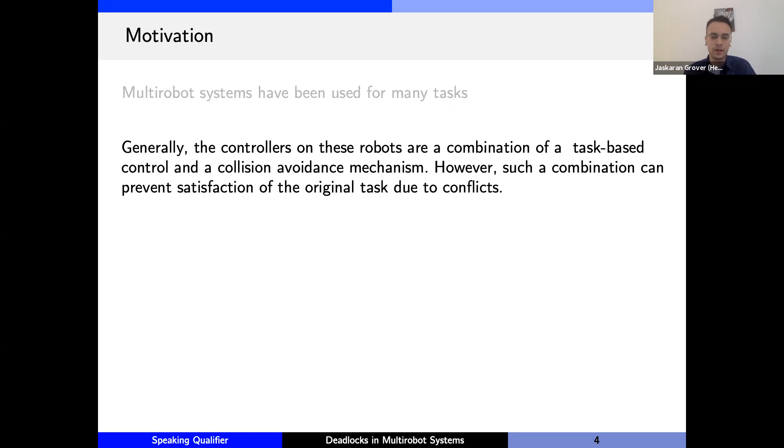Robots may stop moving to maintain safety, and as a result, they can end up falling in deadlocks. And this observation has been noted in several of these works. In fact, many of these works are recent from the last 3 or 4 years. And so given this, we wanted to formally investigate why do deadlocks occur? What is the underlying mechanics behind the incidence of deadlocks? And how can we use this information to resolve deadlocks? So in this presentation, I will try to walk you through some of the answers to these questions that we found along the way.

Okay, so let me summarize the main contributions of our work. Firstly, we provide a mechanism to analyze long-term behavior of reactive optimization-based controllers. In this presentation, we are primarily focusing on control barrier function-based quadratic programs, which are optimization-based controllers and have been very successful recently for synthesizing safe controls for UAVs and legged robots. But in addition to these systems, they've also been used for multi-robot systems, and that is primarily the focus of our presentation. So CBF-QPs, that is short for control barrier function-based quadratic programs, are the underlying control synthesis module that the robots in our multi-robot system will be using.

So we demonstrate that when these controllers are used for collision avoidance, in addition to goal stabilization in multi-robot systems, they can cause deadlocks. And particularly, we show that when there's geometric symmetry in the initial and goal positions of robots, that is a scenario that is particularly susceptible to deadlock. We're not saying that asymmetric situations do not result in deadlock. We're only saying that symmetric ones definitely do.

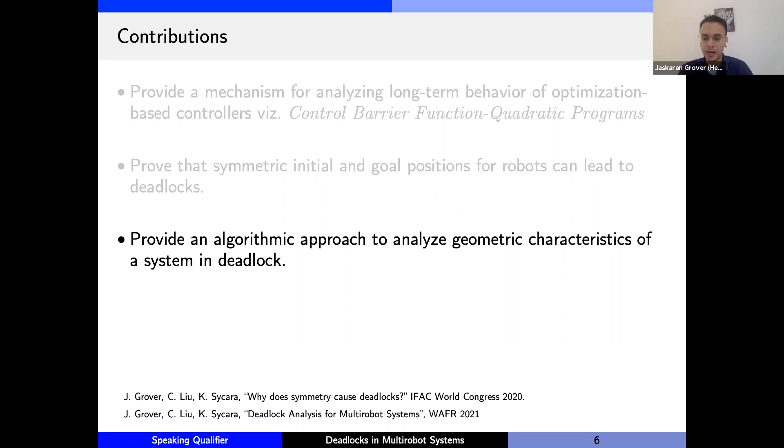We provide an algorithmic approach to analyze geometric characteristics of a system in deadlock. And we use tools from duality theory and KKT conditions to characterize some of the properties of geometric configurations in deadlock. And using these characteristics, we devise an algorithm to resolve deadlocks.

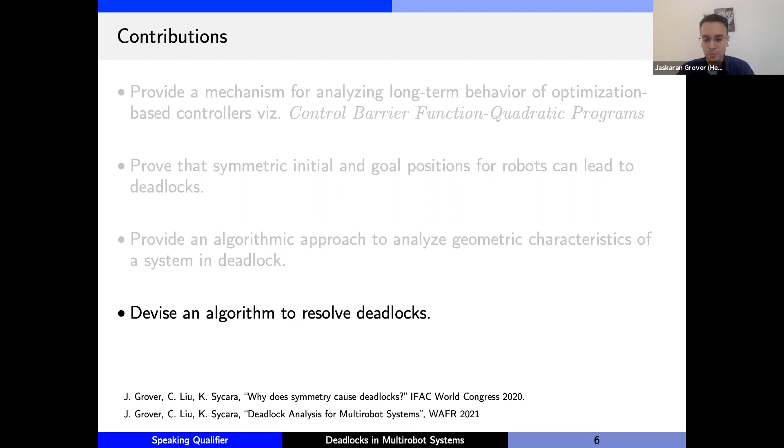All right. So let me go through some prior work and review some terminology from avoidance control and goal stabilization. And the aim here is just to make sure that all of us are on the same page. Since CBF-QPs is a relatively recent subject, there's lots of jargon that is used here. And I just want to make sure that all of us throughout the presentation know what I'm referring to. So everything that I'm going to be presenting in this particular section is going to be on prior work.

Okay, so let's see the setup. We have N robots in the plane. And just to make things simple, we're going to focus on just one ego robot, that is robot i, that is shown in blue color here. And our aim is to make sure that this robot reaches a destination position, that is p_di, while avoiding collisions with every other robot that is shown in gray. Now, the same must hold true for every other robot in the system as well. So each other robot, let's say the gray robot, will have a goal of its own, and it must avoid collisions with every other robot in the system.

So we assume that all these robots are velocity controlled, so they follow single integrator dynamics, which is given by P dot equals U_i. And as far as this dynamical system is concerned, this is the best that we can ask for. And the reason for that is because it's linear, it's controllable, it's first order, and it's decoupled. You can control X and Y independently. So this is as best as it gets.

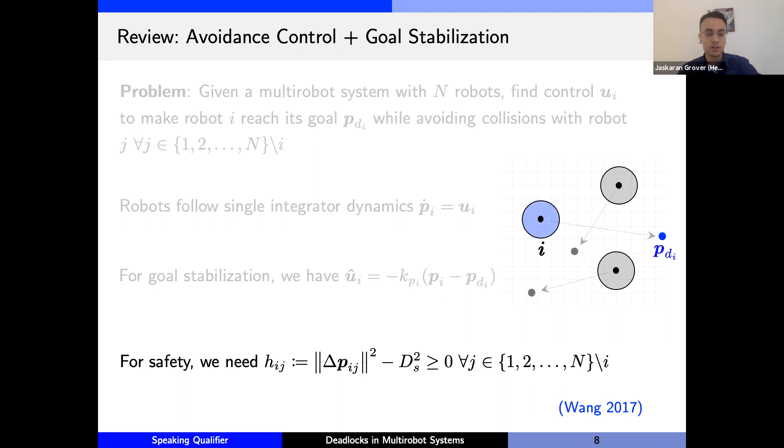And to pose that request, we are posing this safety index that is pairwise. We call it h_ij. And we say that robots i and j are collision-free if and only if h_ij is non-negative. Now, h_ij is known as a control barrier function, or a CBF. All right, so what have we seen here? As I said earlier, for i and j to be collision-free, we need h_ij to be non-negative.

Now, obviously, if it is non-negative at the current time instant, we also want to make sure that the control that we synthesize on the robots makes sure that h_ij remains non-negative at the next time instant as well. And the way that has been done in prior work is by enforcing this derivative requirement on h_ij. So by ensuring that h dot ij is greater than negative gamma times h_ij, we have guarantees that h_ij will remain non-negative at the next time instant.

Now, this differential inequality can be converted to constraints on the controls of robots i and j. This is the constraint on the control of robot i, and this is the constraint on the control of robot j. If the controls of robots i and j satisfy these constraints, then this condition will be guaranteed, and in turn, it will ensure that h_ij remains non-negative. So these constraints are half-space constraints. So the admissible space of feasible controls that satisfies these constraints is convex.

So what have we seen so far? I said that we have a reference control for reaching a goal, U hat, which is a proportional controller. By itself, it guarantees stabilization of the robot at the goal. And just now we saw some constraints to ensure safety. So we have two things here. How do we mediate between them? The way to do that is to pose a quadratic program, an optimization problem that minimizes the deviation from the reference control U hat subject to the safety constraint.

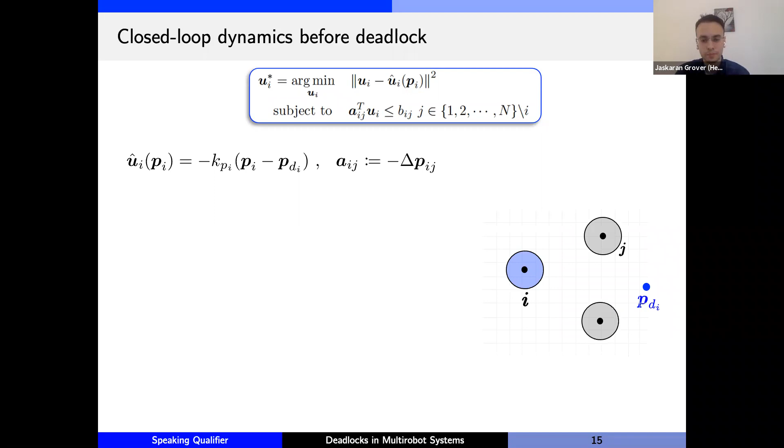So let's look at the geometry of the system. We have several robots here. I told you that U cap is a reference control that causes attraction of the robot to the goal, which is UI cap here. Because this is the primary task, we need to make sure that the optimal control has some component of the task-based control, which is UI cap.

In addition, I also said that Aij is a vector that connects the robot from robot I to robot J. Naturally, we don't want the robot I to go along Aij because that would result in collision with the obstacle. We want the robot to go opposite to Aij, so along negative Aij. But we do want the robot to go along UI cap because that is what will ensure movement towards the destination. So in addition to this, I'm going to add a component that is negative mu ij times aij, which ensures movement opposite to this vector.

And mu ij is just some weight, which is non-negative. It has to be non-negative just to make sure that I does not end up getting attracted to j. That would be antithetical to the collision avoidance requirement. The other purpose that mu serves is that it makes the units consistent. Like this is the unit of velocity and this is the units of position. So mu has units of 1/time.

Another purpose that mu ij serves, it ranks the relative risk associated with several obstacles. So if there's an obstacle that is several miles away, maybe I don't need to worry about collisions with that obstacle. So mu ij would be 0 for that one. And if there's an obstacle that's very close to me, I'll set mu ij to a very large and positive number just so that I duly account for collisions with that obstacle. So it has to be non-negative. And now there's several robots in the system, so I have to sum these repulsive forces from every other robot in the system.

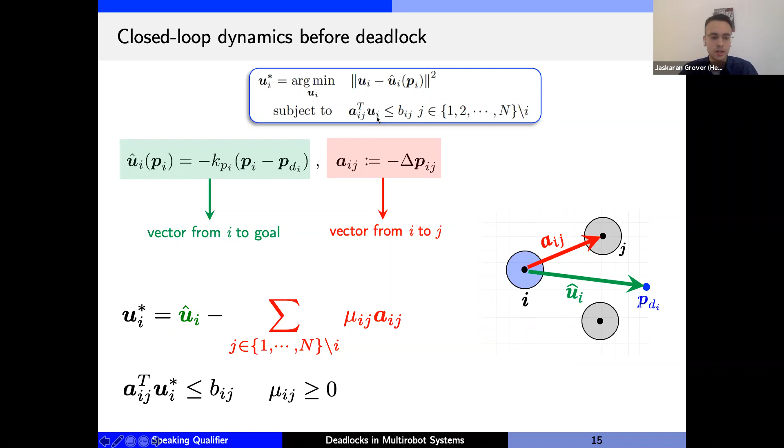So just to summarize, there are 3 things we saw here. I said that the optimal control is sum of 2 components. One is attraction to the goal, and one is repulsion from every other robot in the system. From the perspective of the ego robot, I can just call them obstacles. Mu ij, the weights have to be non-negative for valid repulsion. If they are negative, then you'll get attracted to the obstacle. That's not good. And the third is that the control must satisfy safety constraints as well.

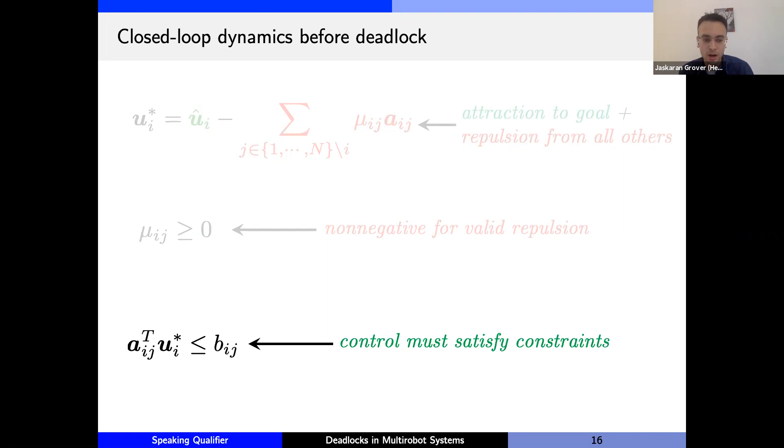There's 3 things here. Now, the claim is that this expression that I just derived in an ad hoc intuitive way is actually the solution to the optimization problem that we just saw. Now, why is that the case? Well, in optimization theory, there's something known as KKT conditions, which are necessary and sufficient conditions of optimality. So I say that UI star is a solution to this optimization problem if and only if UI star satisfies some constraints or equations. And those equations are basically the KKT conditions of this optimization problem. And just to make sure, this optimization problem is convex; that is why if and only if can be said. Otherwise, they're just necessary.

So the first condition, stationarity, is precisely saying that the optimal control is the sum of attractive and repulsive forces. UI cap is the one that's characterizing attraction to the goal, and this is repulsion from obstacles. Second condition, primal feasibility, is saying that UI star satisfies safety constraints. Dual feasibility is saying that the weights have to be non-negative, which we motivated by saying that the repulsions have to be valid. And in KKT conditions' language, mu I star is known as the Lagrange multiplier of this optimization problem.

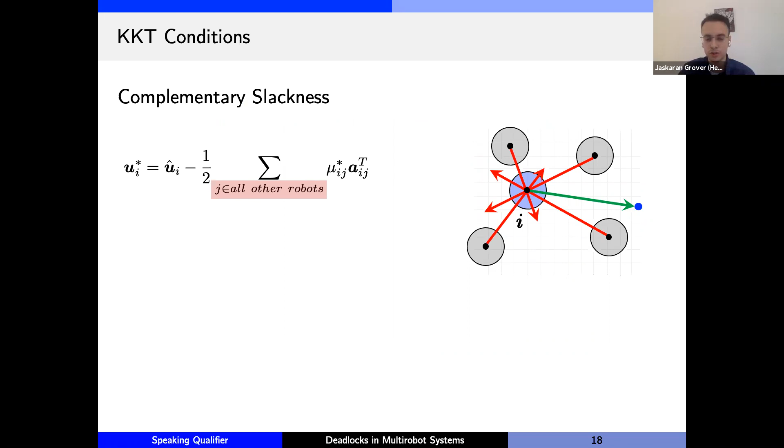And the fourth condition is complementary slackness, which I haven't motivated just yet. It's very straightforward. What it says is the following. So remember that we said that the optimal control has repulsive components from all robots in the system, in addition to the attraction to the goal. What complementary slackness is saying is that you only need repulsive forces from just some obstacles that are called active, and the rest of the obstacles can be ignored, can be neglected.

So in this slide, the red ones are the active obstacles that are actually accounted for while calculating the optimal control of the ego robot, and the gray ones can be neglected. And from my empirical simulations, I've seen that the active ones are the robots that sort of fall in the way of the ego robot trying to go to the goal.

And that's because these robots, which are already behind me, are not going to pose such an imminent threat of collision as those robots that are falling in my way of going to the goal. So I need to duly account for repulsions from the ones that are going to end up, or potentially going to end up, falling in my way.

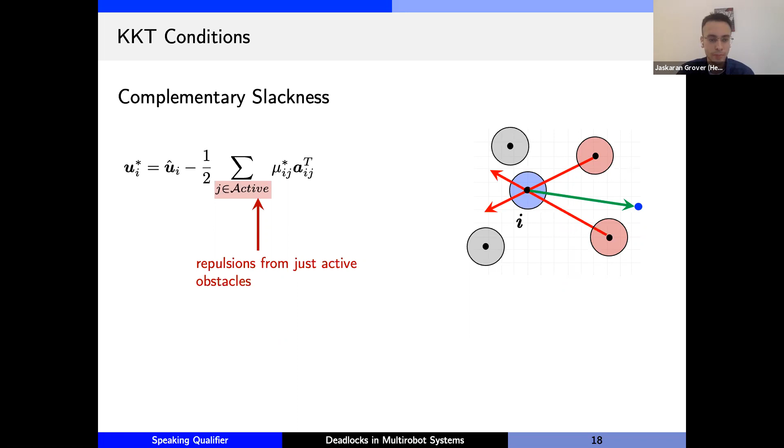So what have we seen so far? I said that all the robots from the perspective of the ego robot can be partitioned into two sets. There's one set that's active, which is the set that I worry about for collisions, and I account for repulsive forces from that set while calculating my optimal control. I said that the optimal control has two components. One is attraction to the goal, and the other is repulsion from the active obstacles.

And as far as whether the strategy works or not, I showed you a simulation in which it does work, so it delivers the robots safely to their goals. But then there are some situations in which it does not work, where depending on the initial positions or goal locations, robots can end up falling in a deadlock. So using this control, that is go to goal and repel from active obstacles, can result in deadlocks as well. And now all the analysis that we've seen is enough machinery for us to start to figure out why this is happening.

So the question that I'm going to answer is: given this control, can you tell me when will deadlock occur? Instead of answering when it will occur, let me first answer the question, when does it necessarily occur? Now, this second question is much easier to answer than the first. I'm not going to characterize every situation in the world where deadlock occurs. I'm only going to characterize a handful of situations where I can guarantee that it will occur.

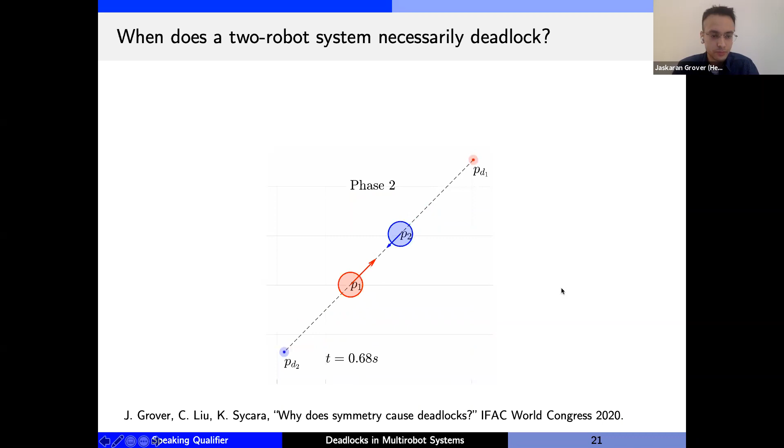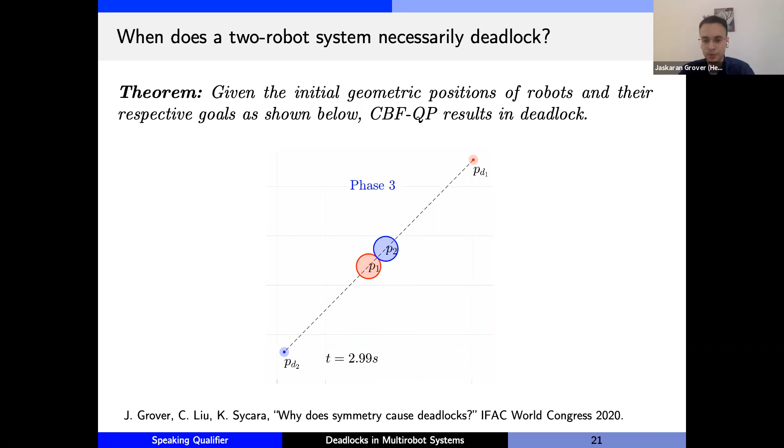So let me play this video. So given the initial positions and goals, CBF-QP results in deadlock. So what is going on here? Let's examine that in more detail. The analysis of the motion of these 2 robots can be broken down into several sequential phases, which depend on whether I, as the ego robot, perceive the other robot as active or not. So when I say that I, as the ego robot, am worried about collisions with the other robot, that means that I do perceive the other robot as active. And if I'm not worried, that robot can be ignored for calculating my optimal control.

Okay, so the analysis begins as follows. There's phase 0 first, which starts at t equals 0. It's just an instantaneous phase; it lasts for 1 instant. And at t equals 0, the robots are not worried about collisions with each other. Then, obviously, this pattern is going to continue for some time. And phase 1 starts when both robots continue to be not worried about collisions with each other.

Can everybody mute themselves, please? Okay.

And then phase 2 starts, where one robot begins to worry about collision with the other, whereas the other robot is still not worried about collision with the first robot. And then you have phase 3, where both robots end up worrying about collisions with each other. And it is in this phase that both these robots end up falling in deadlock.

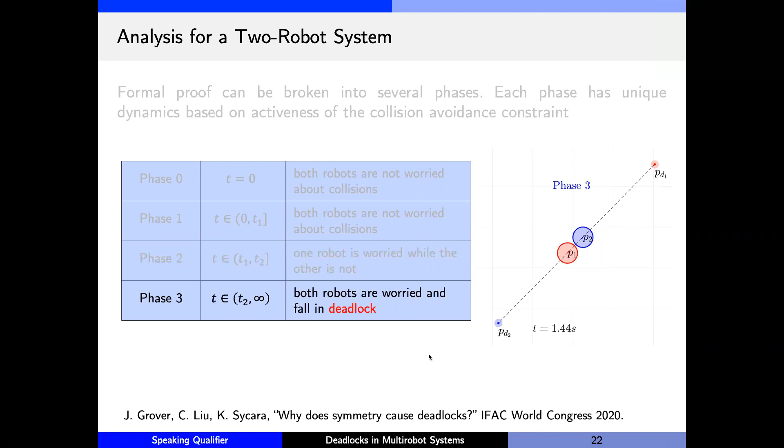All right. So I was saying that there's this notion of a robot being active with respect to me. There's this notion of me worrying about collisions with the other robot. What does it mathematically mean? What does it geometrically mean? So just to recall, I said that the control input is always the result of this optimization problem that all these robots are solving. For the two robot case, there's just going to be one constraint per robot, right? Because I'm only going to think about collisions with the other robots. There's just like one constraint.

Okay, let me see if I can mute everybody.

Okay, well, thank you. So for the two robot case, there's just going to be one constraint per ego robot. If it so happens that the prescribed nominal control satisfies this constraint itself, then the optimization problem will just return u cap itself, simply because if I'm saying that there is a reference with respect to which I want to be minimally far, and the reference itself is satisfying the constraint, then the optimum will be attained at the reference itself at zero cost. It doesn't get any lower than that. So the answer to this optimization problem will be the reference control u cap itself if the reference control satisfies the constraint.

Now, what is more interesting is that the reference control u cap satisfies this constraint if and only if the distance between the robots is more than a certain critical distance, that is beta I. So what I'm saying here is that the robot, let's say this red robot here, can use its reference control, pretending as though there isn't any other robot in the system. But it can only do that if and only if the distance between these two robots is more than the critical distance that robot one considers as a threshold.

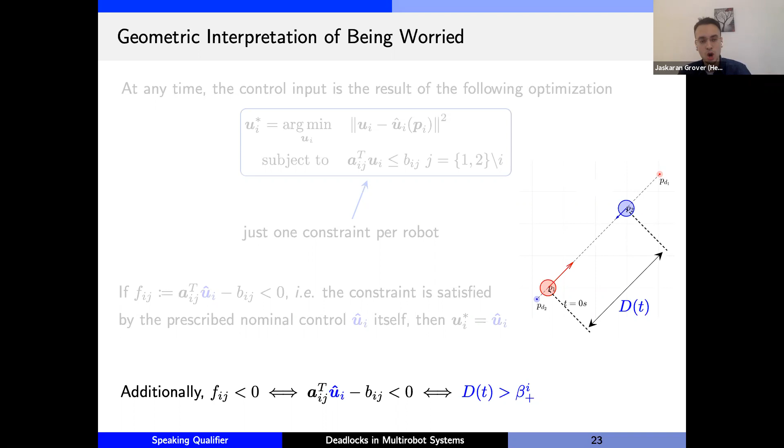So now that we know what it means geometrically to worry, let's start with phase 0 in more detail. At t equals 0, I'm saying that if the distance between the robots is greater than the critical distance of robot 1, meaning that the reference control of robot 1 is satisfying the collision avoidance constraint directly, then robot 1 can use the reference control. Here, this green dot is the inter-robot distance. Blue dot is the critical distance of robot 1, and you can see the green is higher than blue, so the inter-robot distance is more than the critical distance. So we are allowed to use the reference control for robot 1.

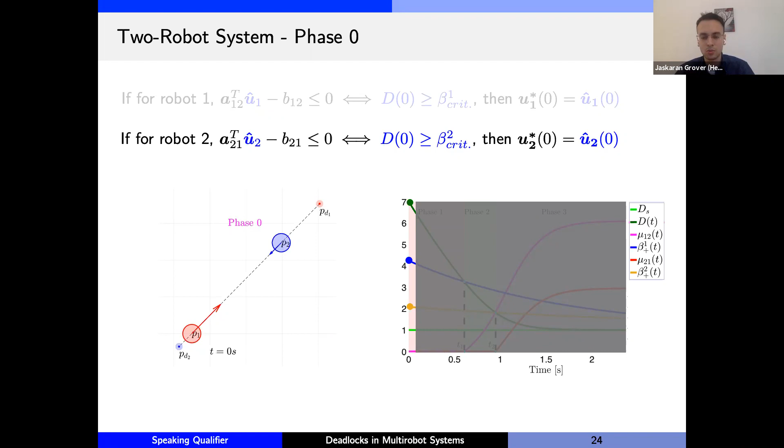The same also holds true for robot 2. The inter-robot distance is greater than the critical distance of robot 2, which is shown in mustard here. So robot 2 can also use its reference control. Now, obviously, this pattern is going to continue for some time. It's not going to be that at one instant I'm not worried and right at the next instant I suddenly start thinking about collisions. So until time t equals t1, the inter-robot distance remains greater than the critical distance of robot 1, so robot 1 can use its reference control. That holds true for robot 2 as well. The inter-robot distance remains greater than the critical distance of robot 2, so robot 2 can also use its reference control.

But eventually, there does come a time, t1, which is shown here, where the inter-robot distance becomes equal to the critical distance of robot 1. And it became equal to the critical distance of robot 1 because robot 1 was vigorous to begin with. It had a higher proportional gain. So naturally, if it was vigorous, its critical distance is going to be higher because the inter-robot distance is going to fall quickly compared to how the critical distance changes with time.

So because of this, robot 1 now starts to worry about collisions with robot 2 because the critical distance has been reached. As far as robot 2 is concerned, the inter-robot distance is still greater than what robot 2 perceives to be a threshold that is too close for comfort. So robot 2 is comfortable in using its reference control.

So I said that robot 1 has started to worry; the optimal control is not going to be equal to the reference control of robot 1. But robot 2 is still not bothered about 1 because the inter-robot distance is greater than what robot 2 perceives as too close for comfort. So this is phase 2.

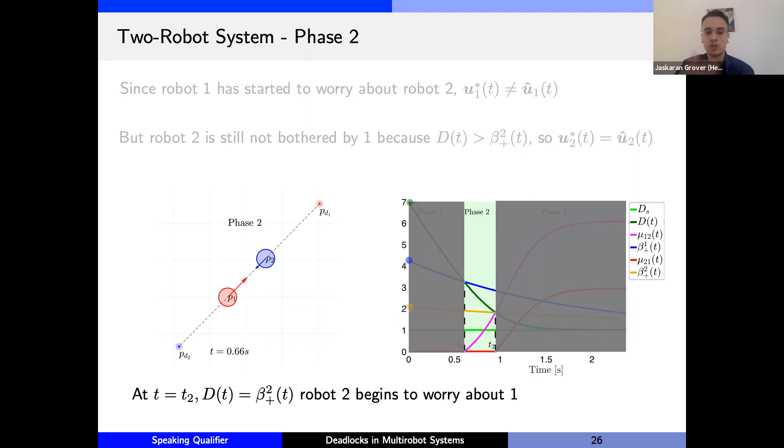But obviously, eventually there does come a time when the inter-robot distance becomes equal to the critical distance of robot 2, that is time t2 here. And that's when robot 2 begins to worry about 1. So 1 was already worried about 2, 2 has begun to worry about 1. That's when phase 3 starts, where both robots perceive the other robot as active.

And we show in the paper that it is in this phase that the distance between the robots exponentially converges to the safety margin, that is d sub s. And because it converges to the safety margin, both robots end up falling in deadlock. So the controls will converge to 0, and because of that, they fall in deadlock.

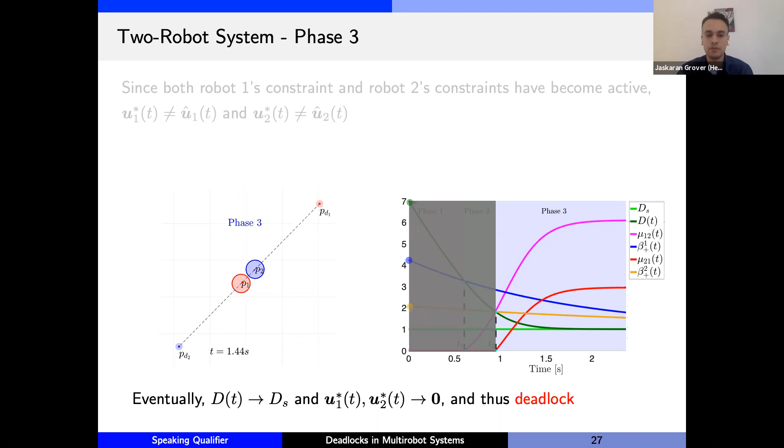So what have we seen so far? I said that at any time during the motion of the robots, whether I as an ego robot perceive the other robot as active or not, meaning whether I worry about collisions with the other robot or not, depends on how far that robot is from me. And I will have a critical distance against which I can do this comparison to figure out whether the other robot is a source of worry or not.

In deadlock, however, when both robots have fallen in deadlock, both robots are worried about collisions with every other robot. And they're perceiving the other robot as active. And the robots are grazing each other. They're exactly separated by the safety margin.

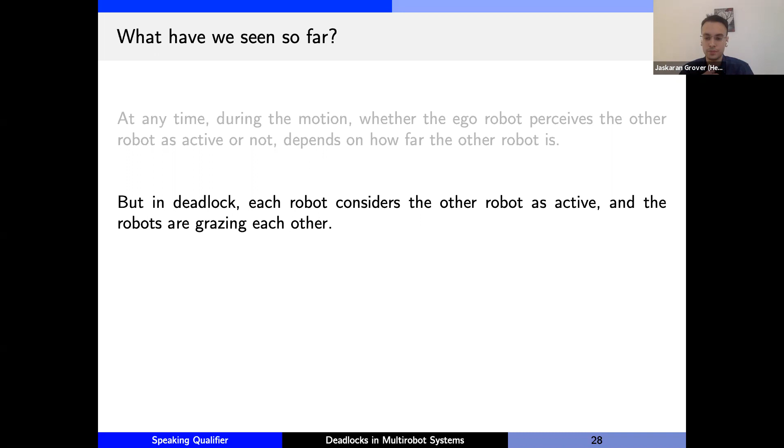And the third thing, I'm just stating that, is that deadlock occurs to prevent collisions. Because if the robots were to move, two things could occur. Either collisions would happen, which is what we don't want, or the robot's motion will incur more cost. So it's not that economic with respect to the cost function that we had in the optimization problem.

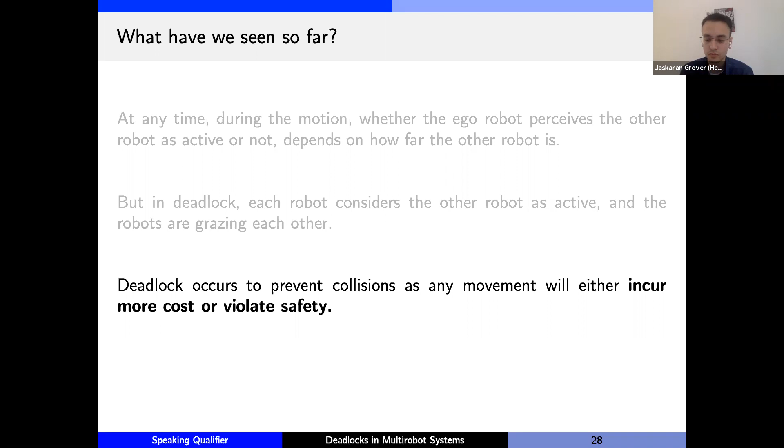All right, so now that we have fallen in deadlock, let me investigate some geometric properties of the robots once they are already in deadlock. So this analysis that I'm going to describe next is independent of the initial conditions. It's independent of the destination positions of the robot. It's just starting with a necessary condition saying that assume robots are in deadlock. What can you tell me about their positions?

Okay, so given that a team of n robots is in system deadlock, meaning that everybody is in deadlock, the first question I'm asking is: what is the number of geometric configurations that are admissible? The reason we care about this question is because if this number is small, let's say that there are two robots, they're in deadlock, what is the number of configurations possible? The answer to that question is 1.

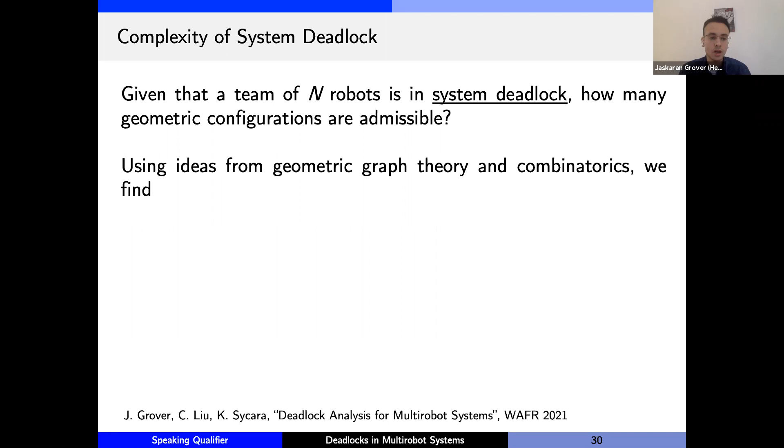Good. If the answer to this question stays small for, let's say, 5 robots and 15 robots, then I can think about enumerating all those configurations one by one and devise a strategy for resolving deadlocks for each of those configurations. But the catch is that unfortunately that number is not small. So we use some ideas from geometric graph theory and combinatorics to find that there's a very large lower bound. For n robots, this lower bound is (n+1)·(n−1)!. And we know that factorial overtakes exponential, so it's worse than exponential.

And this combinatorial complexity is going to create problems in resolving deadlock, simply because for 4 robots itself, the answer to this question is like 40. For 5 robots, it's something like 150. So because of the explosion in the number of possible positions that the robots can be in that all satisfy the criteria of being in deadlock, it's hard to devise a resolution strategy for each and every one of these configurations. And so that is why in this work, we don't have a universal n-robot resolution mechanism, but is it a question?

Okay, but that's okay because at least we know what the underlying bottleneck is. So with that in mind, let's consider a small number of robots. We'll start with 2. And for 2 robots, one of the things that we can say is that the system deadlock set is non-empty, meaning that there always will exist some states that will all satisfy the criteria of these 2 robots being in deadlock. I can give you a family of states that will all definitely be in deadlock.

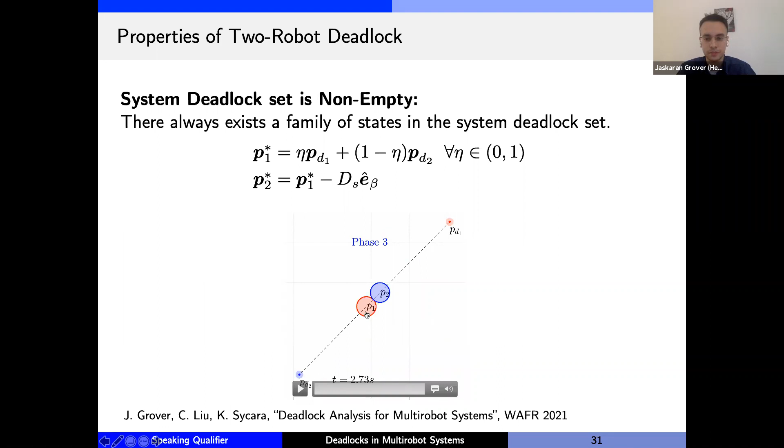The second property for two robots is that the robots are at the verge of colliding with one another, so they're grazing each other. And this makes intuitive sense, because if these robots were in deadlock but had wiggle room between them, then they would still slowly be able to move towards one another. And the fact that they could move would contradict the definition of deadlock.

So that is why it stands to reason that once they are in deadlock, they've exhausted all the wiggle room, and that's when they're grazing each other. And because they're grazing each other and just at the brink of violating safety, the state of the system is on the boundary of the safety set, which is shown here. So red is the unsafe region and green is the safe region.

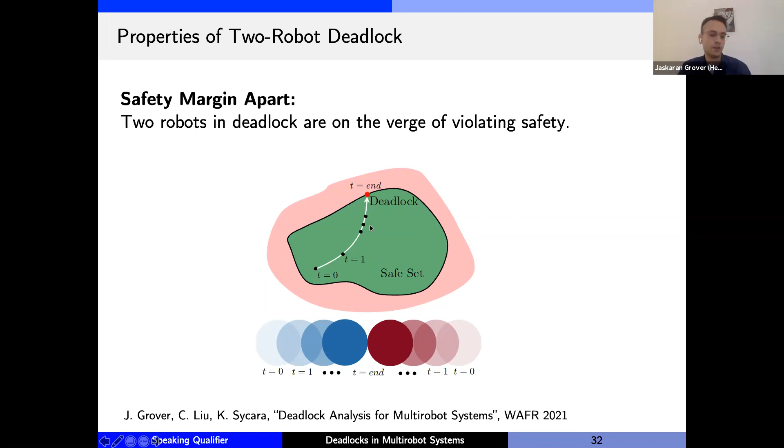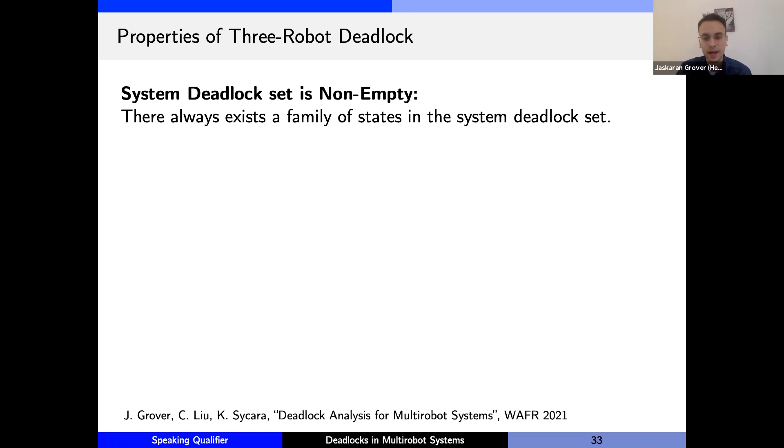We can also say these properties about three robots. System deadlock set is non-empty. I can propose a set of candidate states that will satisfy the criteria of three robots being in deadlock. And the robots are going to be safety margin apart. For three robots, there are two qualitative categories of configurations possible. In the first category, all robots are grazing each other, so that's why they form an equilateral triangle. In the second category, it's exactly two pairs that are grazing each other. So J and K are not perceiving each other as active, but J and I are, and I and K are.

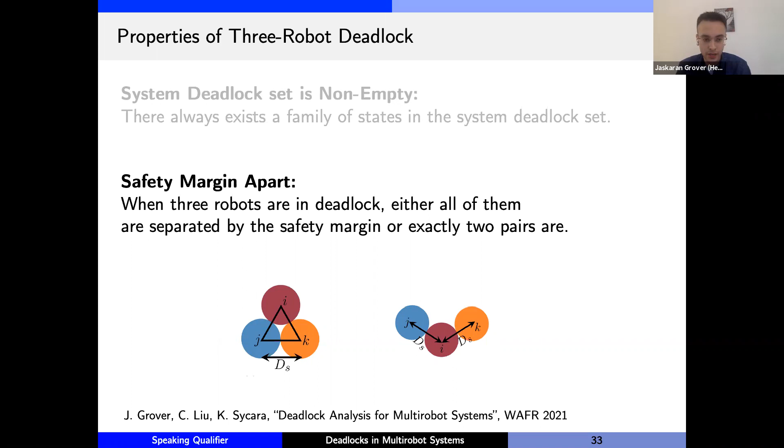So now that we've seen some of the properties of 2 and 3 robot deadlock, the question is, what can we do with these properties to resolve deadlock? So now I'm going to look at this after deadlock phase, which means that we are looking at some strategies to resolve deadlock. Okay, so as I said, given all these properties, how can we leverage them to resolve deadlock?

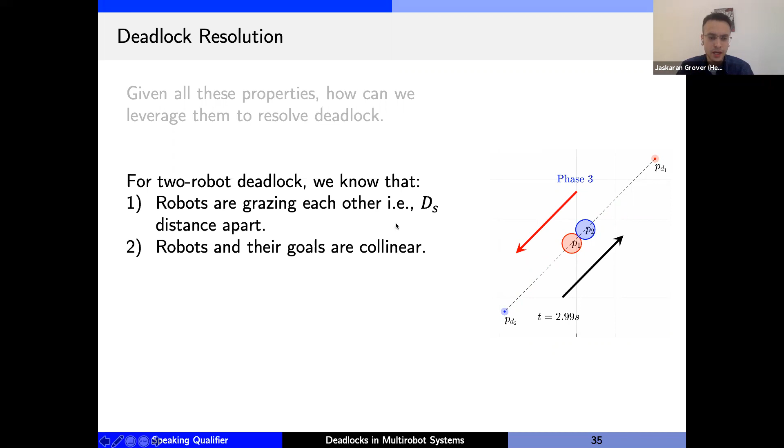For the two robot deadlock, I told you two things. The first one was that once the robots are in deadlock, the robots would be grazing each other. They're exactly separated by the safety margin. And that the robots and their goal positions are collinear. These two observations can be summarized into one, saying that the vector connecting P1 to P2 is anti-parallel to the vector connecting their respective goals.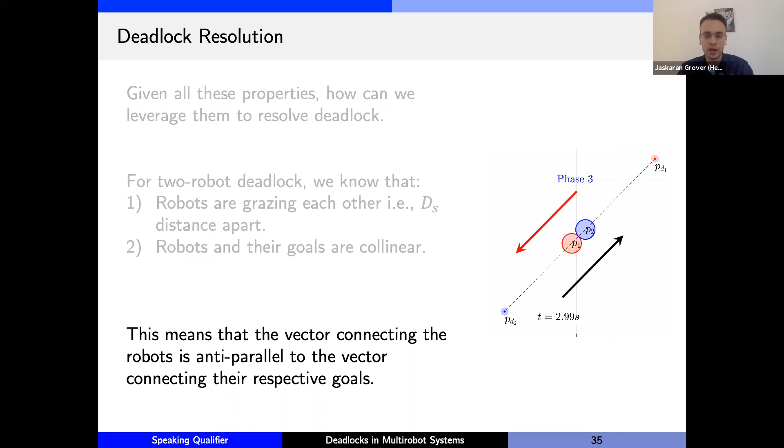So PD1 to PD2 is a vector that's shown in red here. This P1 to P2 is the vector that's shown in black here. So the one in red is anti-parallel to the one in black. And what I want to do to resolve deadlock is to make sure that these two vectors are parallel to each other. And the way to do that is to rotate this one such that it aligns with the red one. I'll explain why I'm doing that, and this will make sense when I tell you the full strategy to resolve deadlock.

Okay. So I'm proposing a three-phase strategy to resolve deadlock. The first phase is using the original CBF QP-based controllers. If these controllers don't result in robots falling in deadlock, we don't have to worry about deadlock in the first place. So let's just use these controllers as you normally would, because they come with good properties. So why not use them? But if it so happens that they do end up resulting in deadlock, I have some way to check whether this has occurred.

And I'll switch to phase 2, in which I'll use feedback linearization. It's a technique from nonlinear systems theory to make sure that those vectors align with one another. So there was one vector connecting the goal of 1 to 2, and the other vector connecting the robot 1 to 2, and these vectors are anti-parallel. I want to make sure that both these vectors are parallel.

So I'll use feedback linearization to interpret the assembly of two robots as a rod, and I'll generate equal moments, equal torques on both sides to make sure that this assembly rotates as if it was a rigid rod. And once this rotation is complete, which is guaranteed by the way feedback linearization works, I'll just use the prescribed reference proportional controller to deliver the robots to the goals.

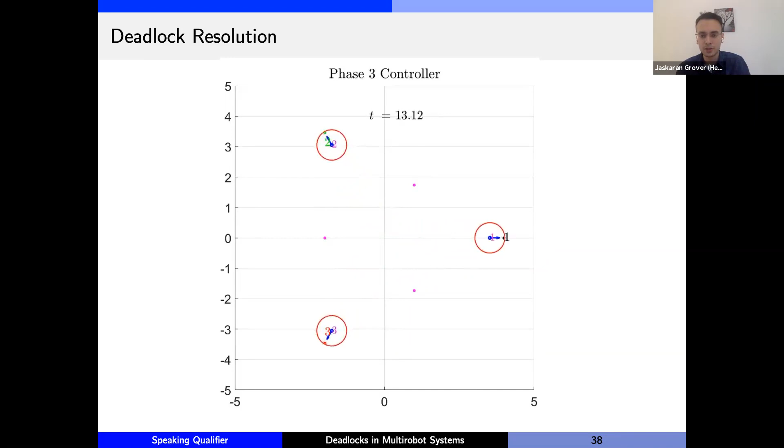This also works in 3 robots. So I have robot 1 here that's trying to go to its antipodal position, robot 2 here that's trying to go to its antipodal position, and robot 3 that's trying to go here. So it takes some time to check whether the rotation is complete, because I have some thresholds in my code to do that. So that was phase 3.

Okay, so with that, I'd like to summarize everything that I've presented today. We analyzed long-term behavior of reactive optimization-based controllers using duality theory. We demonstrated that whenever there's geometric symmetry in the initial positions and goal locations of the robots, that constrains CBF QPs to generate velocities that inevitably cause deadlock. And then we used duality theory again to analyze possible configurations of robots when deadlock occurs.

In future, we plan to extend this analysis to other reactive control synthesis methods, such as velocity obstacles. And in addition to that, we also plan to extend this analysis to N robot systems, but with arbitrary initial conditions, or relax some of the assumptions that we made before to prove the results.

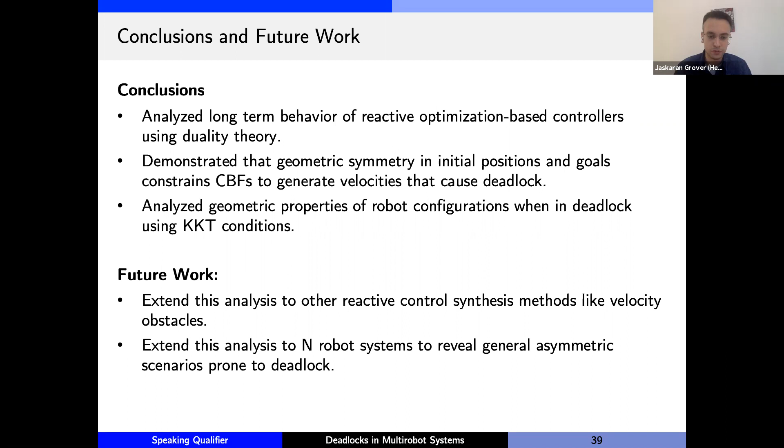Cool. Thank you, Jaskaran. Katia, I think you're muted. Hello? Yes, I was muted. Okay, so are there any questions? So first of all, we are going to take questions from the committee, and the further away person in the committee, since Changliu and I are co-advisors. So Howie, you get to go first.

You know, it's funny. I always thought I was closer than the two of you in this relationship to Karan, but I guess publicly I have to find out that's not true. Okay, so yes, Karan, this was a great talk. And if you saw me typing during your talk, I was taking notes, which I'll share with Changliu and Katia afterwards. You did a wonderful job expressing an idea with rigor and putting forth a result. So I have a bunch of questions for you, which you can take offline, but let me ask one big question here.

So while I was watching your talk, I was thinking about, what if we had some giant centralized Uber planner, planning for everything, and we just optimize from there to get your optimal controllers for all your robots that go from start to goal. And then the obvious answer as to why you don't do that is because the computational complexity would be horrific. So that's why you do something in a decentralized way, and then you deal with the deadlock as it comes. Right. So I'm wondering, is there a middle ground?

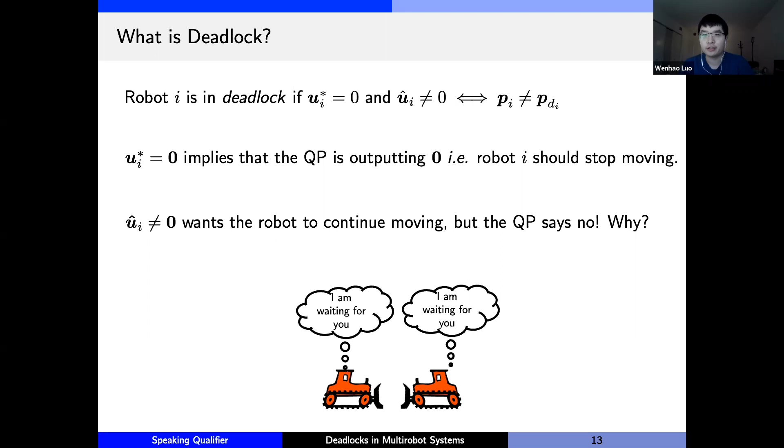Right. Yes. So I'll use this slide as an example to illustrate that. This paper by Stipanovic et al. from UIUC, the control that this paper is using surprisingly looks similar to the control that we have. It has attractive components, it has repulsive components. So I do think that the same analysis can be applied to the work that they have done. Their safe control synthesis is done using value functions and manually engineering attractions and repulsions, not through an optimization, but hand engineering them. And they have proofs that this strategy will work. But they also talk about deadlocks in their context.

And now, if we talk about velocity obstacles, because velocity obstacles also admit a convex optimization form when computing the safe controls for every robot, I do think that the same analysis can be extended to velocity obstacles as well. I've tried to play around with that. It's slightly complicated, but I think if I were to work super hard on velocity obstacles, the same conclusions can be said about those as well. And then there are other safe set methods like Changliu's work, which can also be fit into the same format, and therefore this analysis can be applied to those safe set algorithms as well.

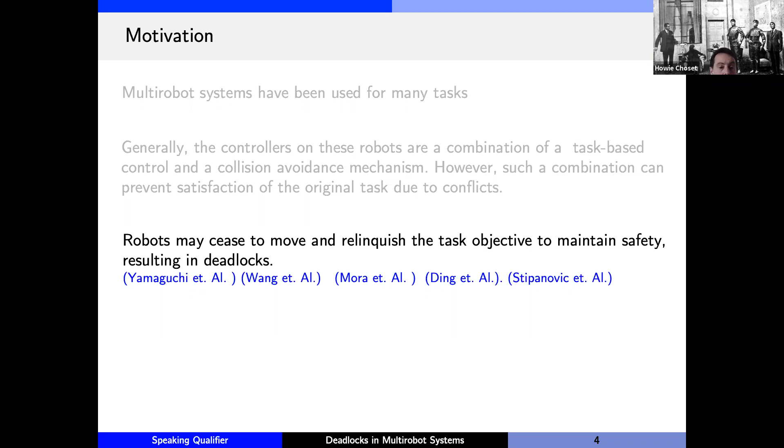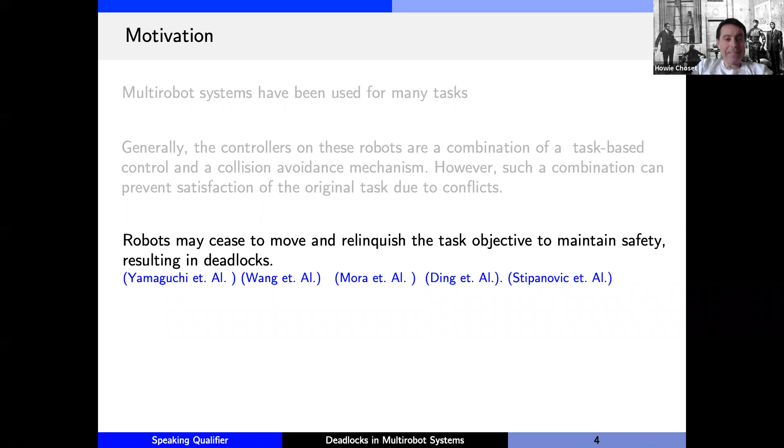Okay. Are there any other questions from the audience? Well, I hear none. So now, please, everybody leave the room, everybody, including Jaskaran. Cool. Interesting. So if I end the meeting, then... don't end the meeting. Let us be the host, and then